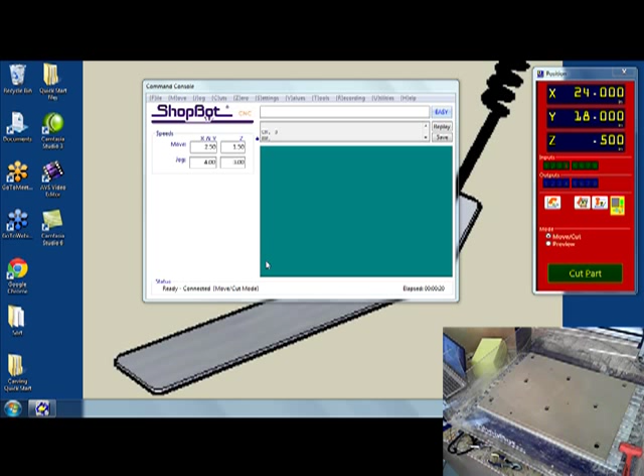Today's training is going to be doing some examples of some alternative hold-down methods. We're all used to using our screws or our vacuum, but sometimes we've got to come up with some new ideas. So I'm going to show you some stuff with some clamping and some fixturing. I'm going to show you some aftermarket accessories you can buy, and then we're going to even get into using some 3M adhesive to hold it down to the spoil board just with some spray adhesive without making too big of a mess. So let's go ahead and get started.

So one thing that we have now created is a thing called the quick start files, and this is something that we made available for our desktop, but any of these can be scaled up and used with the bigger machines. If you look at the camera right now and see our spoil board, we've got our 18-inch by 24-inch spoil board mounted on our desktop, but we've got a rabbet cut all the way around it. We used the VCarve Pro software to have it cut on the negative of 0 Y and 0 X.

So it did just that. So when I put a board or a piece of material up here, I can line it up right with the corner of that rabbet, and that way I ensure I'm getting my 0, 0 every time. So we've created this quick start jig where if you go in here and look at the basic deck, you'll see this basic deck that you're seeing on the camera.

You're seeing the oblong holes that are used so you can mount the T-nuts into the aluminum extrusion. And you can see right here where there's a rabbet tool path, so it will cut down onto the negative part of X and Y. So this is just a real nice little feature that we've got that can go onto the table.

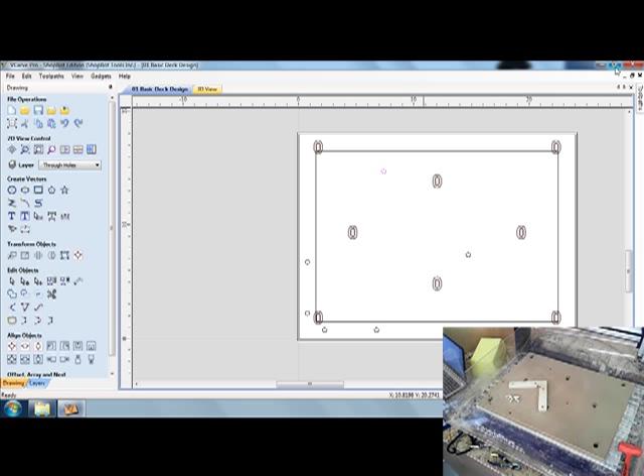So these are holes that we drilled down into the spoil board where we're going to put a dowel pin. You can go to any of your local hardware stores, or you can order them online. They make these little dowel pins, and with the dowel pin we have a corner jig and two tapered blocks that we'll use to hold our material down.

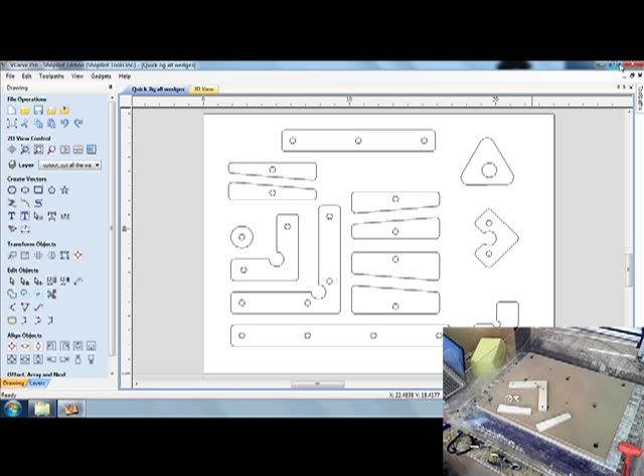And again, with these files, not only do you get the basic deck, but there's also the quick wedges. Here's all of your different types of wedges you might be using. Maybe you're doing something that's round or a polygon that has more sides that isn't an even square, so you can clamp it in place. And it also has a set of projects, and we'll get into them in a sec, but let's focus back over here on the camera.

If you notice, here's our 4 holes. I can just push my dowel pins down inside these, and these holes here, I can take my jig and set it right on top.

And since these are freshly cut, they are stiff, well, they fit in there. Then I've got 2 out here in the field, and you can put these any which way you want. There's some people that go and put a whole series of holes for doing different sized parts. What this jig here is for is our little quick start file that has the different projects in it. So I'll tap these in,

and the way this jig is set up is it's able to fit a certain 11 5/8 by 11 5/8 blank that we have. We set it right in here. The corner's cut out round, so the 0, 0 corner can get down past that. And then these tapered jigs, they slide in place, and then you just use your mallet to tighten them up so that it won't come loose, and now that's held in place.

So this is just a nice little feature to make it easy to pull on and off. I get done with my cut, boom, I loosen up my jigs, I pull it out, I throw my next blank in, tighten these down, and hit file, part load, and go again. So nice little feature we've got with these jigs. And here's one of the project files that we cut.

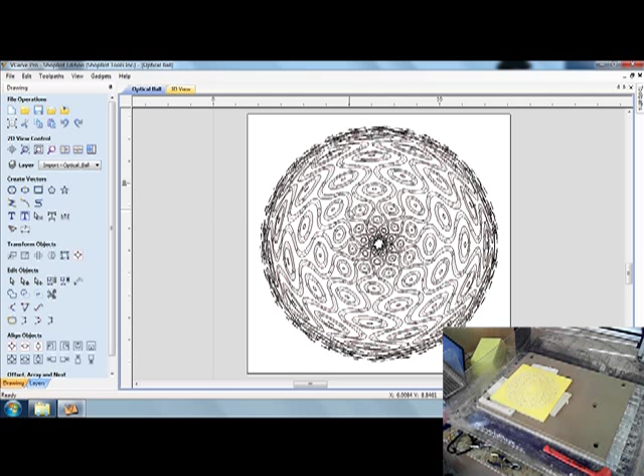This is called the optical ball. And I'll bring up the VCarve Pro file for this. And right there's nothing that we're not used to seeing. The white background showing our blank size and our part in it. But one thing, if you dial in right here and look real close, there's some phantom lines. And where these two come together, that's your actual 0-0 origin. And notice that the corner of this material is over and up. And if I pulled in some measurement lines, I see it's 1.5 inches, 1.5 inches over.

And if you go up and check your setup job dimensions, notice when this file was created, instead of having it at 0-0, there was actually an offset put in of 1.5 inches and 1.5 inches. So this will make life a lot easier for you, if this is a jig you're going to use, to put that offset in. That way you're not having to move the keypad around and try to 0-0 it by hand or by eye. So you can always put an offset in right into your file, and it'll toolpath and everything will come out just like you normally do at 0-0.

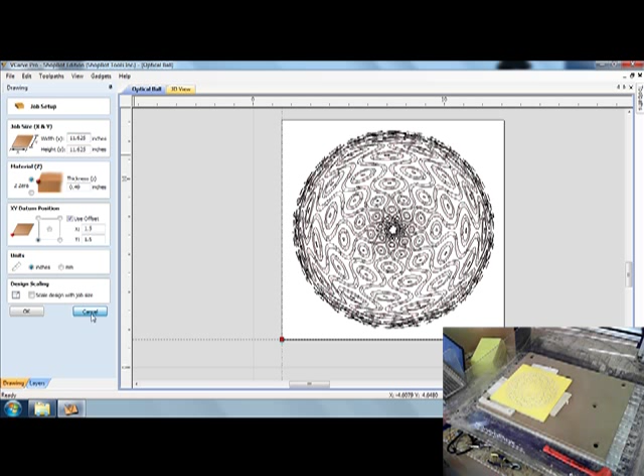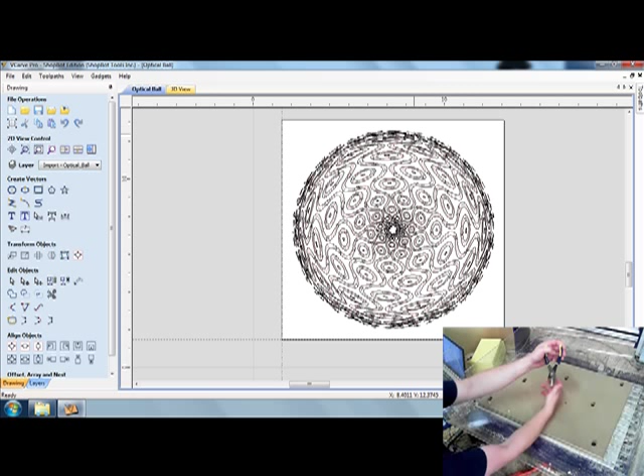Yeah, that's an option. The nice thing about this is, if I'm done cutting with this, all I have to do is loosen these out. I pull my jig off. I can pull all these parts off, and I pull my dowels out. And there's nothing left. There's nothing in the way. There's no hardware. There's nothing metal it's gonna run into. There's no clamps. It's all just removed. I'm back to a bare spoil board.

The only thing, just keep in mind when you start cutting a lot with these, you will fill up these holes with sawdust. So sometimes you have to blow them out or vacuum them out before you go on to your next cut. So that's something we have called a quick start guide. And like I said, just call in if it's something you want to use.

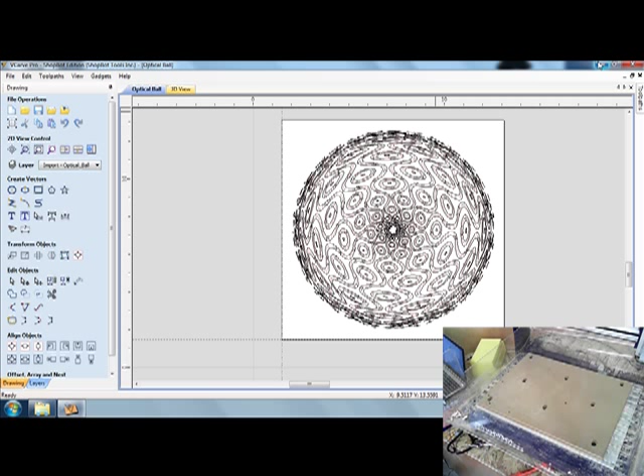So just to start going along with these tapered little clamps to hold things in, I had to go out to Greensboro, just west of us in North Carolina, a couple of months ago, and I got to work with the local state's Skills USA. And Skills USA is vocational programs at your secondary and post-secondary level, and what they do is they have competitions in cabinet making, construction, baking, cosmetology, all kinds of stuff, anything in the vocational trade. So I got to go out and help with the cabinet making.

We took a ShopBot out there, and we got to do some pretty neat things. So the kids had to build this. It had a drawer and a door. It was a little footstool they had to build, all out of maple and walnut and some various plywoods. So one thing that they had to do with me is they had to bring over their part, and it had to be an exact size.

And what they would do is they'd have to sit it inside of my jig, and then I would put my clamps on, hold it in place, and then run the file. So for them, they had to bring it over. It had to be a certain size or it wouldn't fit.

And being a former high school shop teacher myself, I remember that when you tell a kid that this needs to be 21.5 by 9.5, they're not going to bring you something every time that's 21.5 by 9.5. Just learning to use a tape measure seems to be an issue for the next generation here.

So what I did with this is I actually oversized it a little bit. So on this top here, it's a little bit bigger and a little bit bigger. So then these wedge clamps can come down in and actually wedge a board in there that might not be the correct size. So they could actually be plus or minus, say, 1/8 of an inch bigger or smaller, and it would still fit in my jig. Because I'd hate for them to have to come over there and it didn't fit, and then they couldn't continue on.

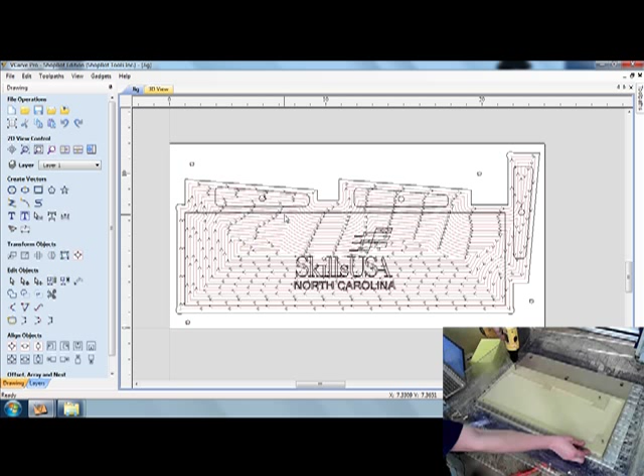So I set it up on here. I find where it's 0, 0. I line it up with my rabbet. It screws down in place. Alright. So with this being screwed down in place, now when I do my C3, it's going to come over and find 0, 0 like it did, but I don't have an offset on this one because I'm actually going to draw my toolpath off this part.

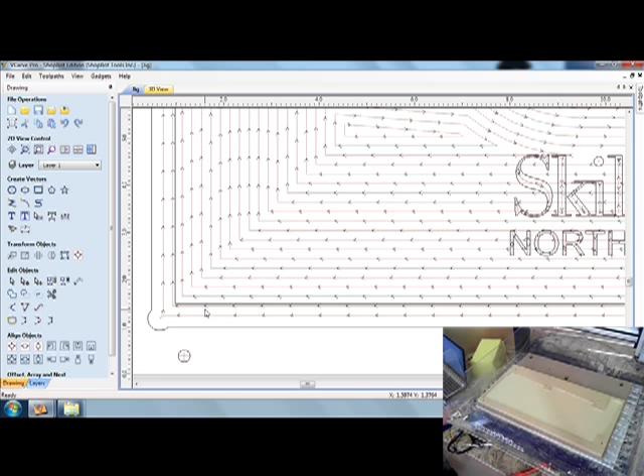So the way this one would be is I would put that on, they would bring over their project, that would sit, and I'd take my 3 clamps, 2 of them to hold it down this way, and 1 of them to hold it over this way. So this 0, 0 never changes. If they're a little bit extra this way or a little bit extra that way, they're still going to be off the same 0, 0. So the V-carve would be in the same spot on that. So that would be held in place right there.

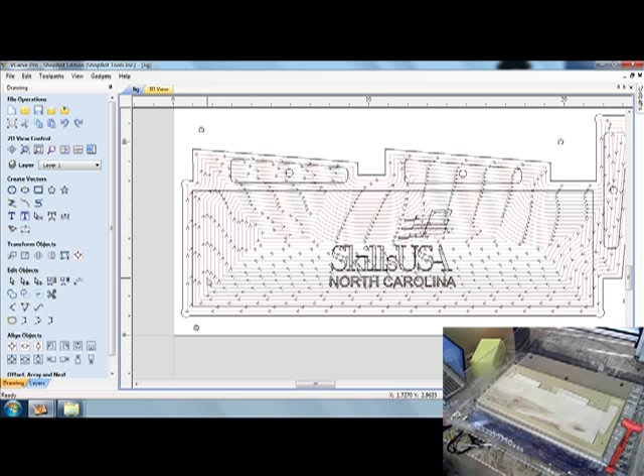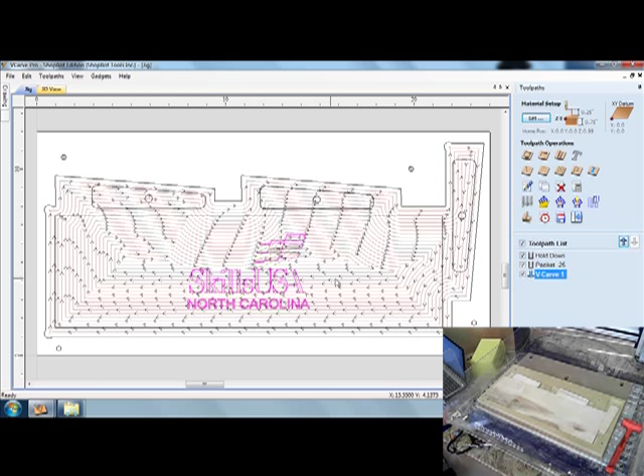And at that point, you'll see that the toolpath for that was just the V-carve that I had here, 0 to the top. So it doesn't matter what part they would bring over. If each piece was plus or minus a little bit of X or Y, it was all the same thickness and material that we had. I didn't have to re-zero it every single time.

So to go ahead and cut this on here, let me save this V-carve out, so you can see how this thing holds in place. Let's go. V-carve skills logo. And with that, I'll open up my ShopBot software. I've already zeroed my X and my Y, but I have not zeroed my Z. So let me just quickly jog it over. We'll jog it over 4, 4.

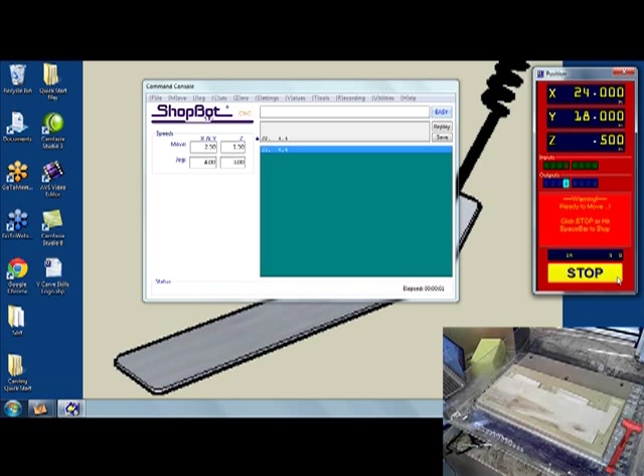I don't know who found this piece of wood with a knot in there, but that's all they gave me.

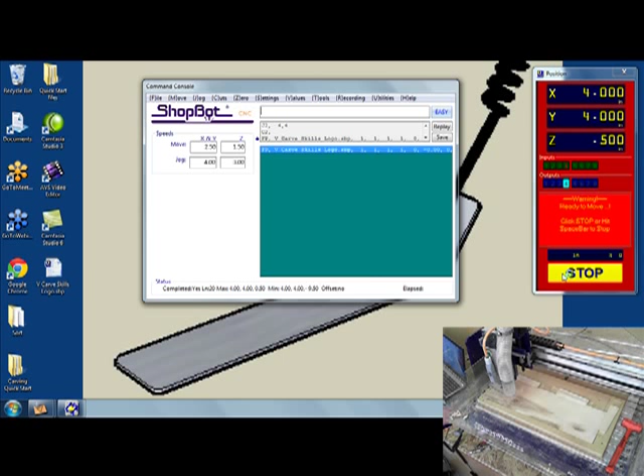And then I can just load my file up. Everything's going to be held in place with my little jig, and it's all good. Okay.

So just to think about what we've seen so far, we had one fixture that used the wedges that was built down into the table. This is a fixture that can come off and go onto anybody's table. As long as you set it up with the 0, 0 at the same spot, it's always going to be lining back up.

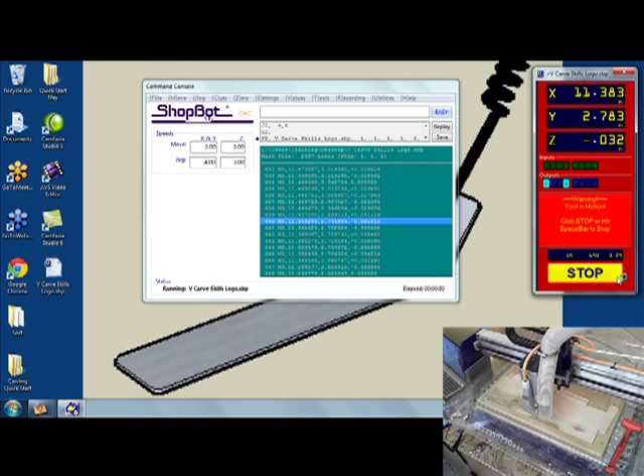Of course, I gotta put in the disclaimer, all of you at home, you're gonna have your guards in place and your dust collector on and all of that. We're doing this for demonstration purposes only.

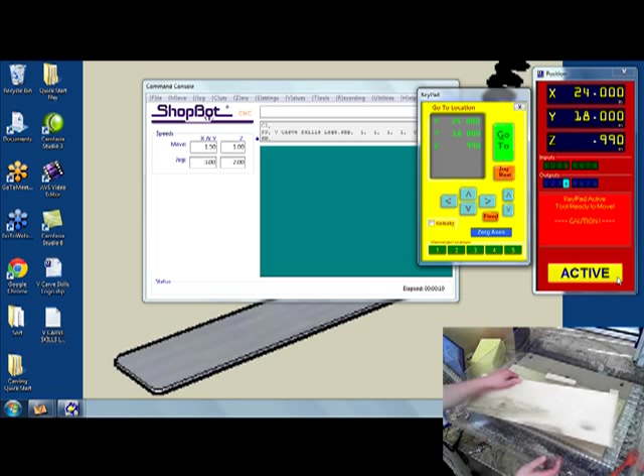Alright, so there's our little thing. So for this it was nice because I had to do 15 of them, and we had to do them quick as the kids brought them over. As soon as they get done, I loosen it up, pull their part out, hand it to them. Next guy comes and brings his and sets it in place. So nice, quick jig. Made it nice and easy to transition from piece to piece.

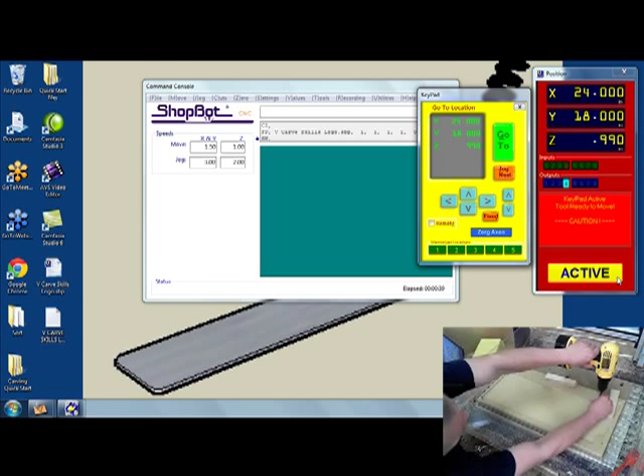And so just remember too, when you start getting into making these jigs or fixtures, if you have a part that you're cutting at a certain size, maybe you wanted this to fit these little plaques, you need to make sure that when you go and cut your jig out for it, you give it a little bit of a tolerance, because the ShopBot will cut it exact to that dimension. So if you have a 6-inch circle and you put a 6-inch pocket for it to come out of, it's probably not going to fit in there. It'll go in, but it might not come back out.

This next jig I'm going to show you is one that I use for cutting out little medallions at our training. So I've got these medallions here that I've got several of them already cut to size, and all I want to do is show how to do 3D carving. So what we would do is, it shows right on the jig, mount it at 0, 0 is where we would mount it and screw it down in, and then the plaque would fit right down inside of it. And this is just a friction fit. It actually fits really tight right now because the humidity is up here in North Carolina.

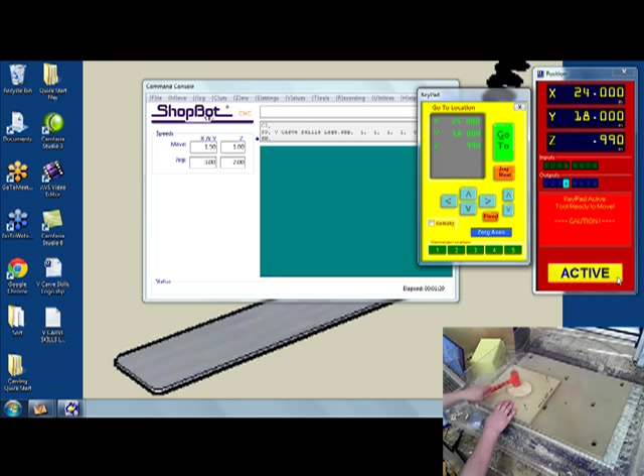So then I would bring it over and zero off the top. I could just pull this plaque out. Maybe I had to flip it over, do a 2-sided carving on it. I'll show you the file on that one. So really all that one is the Plaque Jig. So there's the jig with the different plaques. There's my jig, and you can see there would be the plaque. Here's the original plaque over here that I had, and then here's a little bit of a distance in between.

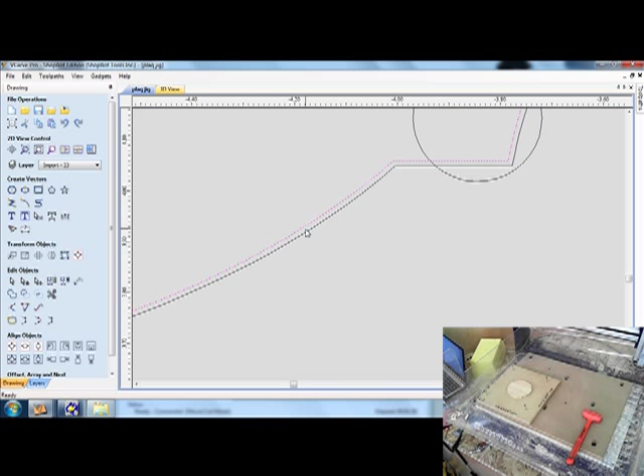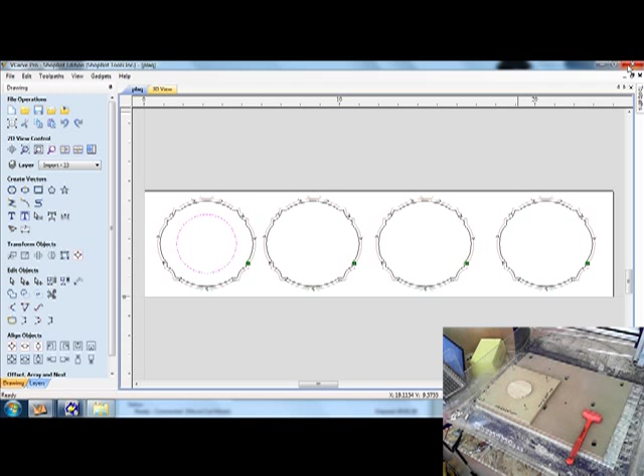It's a 0.01 in between there, so I put a tolerance on it so it actually pocketed it out a little bit larger. So I've got that fixture, and then I can sit here with my other wood and just cut plaques out and have all these plaques ahead of time, and then I know when I go and create my 3D carving, that 3-inch circle that I cut right there fits in there very nicely. So just another quick jig to show you. But this one's been real nice for training. I throw it up every month, screw it down at 0, 0, do my C3, bring my ball nose over here, C2 it, have the new students design their 3D, and then we cut it right into that plaque.

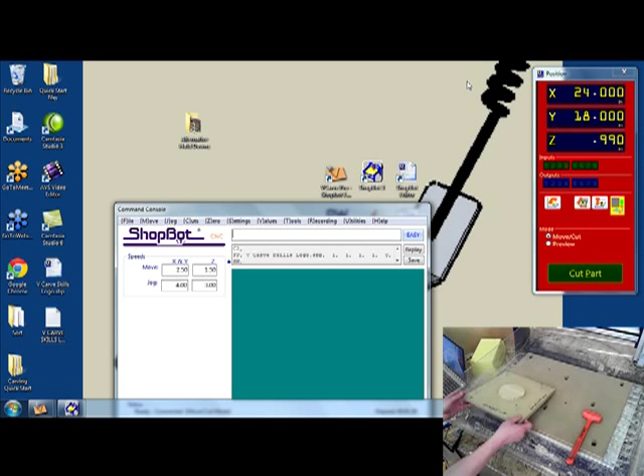So another one that's kind of neat to show is, these are all ones that are nice because they're easily removable. The one I was looking to show you here, this is the one that we did in Atlanta last year at our IWF show. So we cut these plaques out. So if you look at the camera right now, I had all of these wood chunks made for us ahead of time. All of these were 3/4 inch and all the same width and same length.

So all we did was we had this one desktop set up, and all it did was cut the 3D clip arts out for all the different armed services. And then when people would come by, we'd hand it to them, thank them for their service, and throw the next one in. So if you look at the picture, you can see where we got a little bolt right there, one underneath the sawdust, and then there's the same thing over here in the X.

So what I could do, as soon as that thing got cutting, move it out of the way, hit the 4 clamps off, and throw the next piece in, bring it over to those bolts, so it was 0, 0, and hit enter and start cutting again. So pretty slick little jig.

The only downfall about something like this is now I've kind of got these 4 clamps and I've got them bolted into the table, so I've really now dedicated my table to this. If it's something where I had to run 1,000 of these or it's a dedicated machine, it's not a big deal. But if it's a community used machine where it's this one day and that the next day, you got a lot of time into setup.

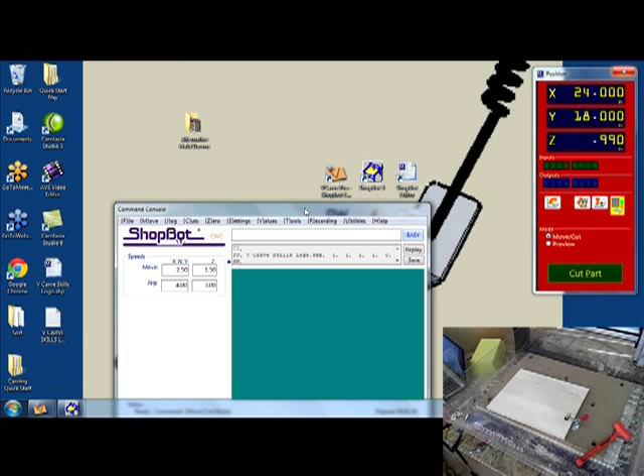Another thing, look at those red handles. I think they made them red for a reason, as he pointed out to us. You run into those with your bit, and they're steel screwed down into your table. You're probably going to break your bit. So when you get into drawing your files, you'll actually want to create a different home position.

So another thing that we have, and I've been getting real fond of this one lately, it's your regular old nail gun that we're all used to using, our finish nail gun. This is a gun that's made by a company called Omer, O-M-E-R. But instead of shooting the steel nails that we're used to, it actually shoots a plastic nail. So it won't matter if we run into it with our bit. The bit would cut right through this, just like it cuts through the different materials. If it was the metal nail, it would ruin a bit.

But it's a real nice little gun. It doesn't hold up the best for oak or maple, or real hard wood, but to put it down through plywood or into MDF, it's a good holder. It does hold really well. The thing about it too is when you go to snap them off, it usually breaks the nail off inside and leaves it nice and flat, so you don't have to come back and sand these. So that's another thing that's real nice about that gun. So just wanted to show you.

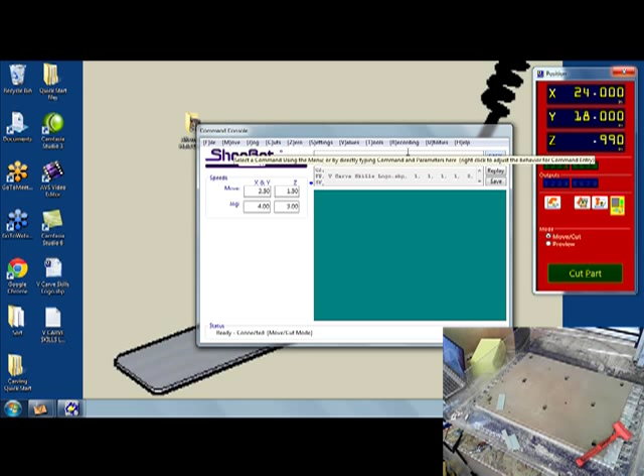Alright, I think I've got two of them left here. My favorite two we'll spend a little bit of time on. But before I do that, I did have a couple people respond when I sent out the email about alternative methods. I said, hey, what do you have that you want to share? What works for you?

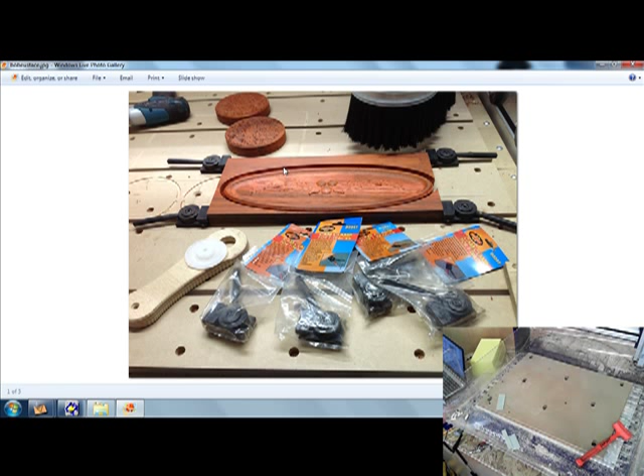So Bob Eustace sent us this from way down under, who has a shop, and he uses these cam clamps. They go down in little T-slots, and I believe he said he got these from Rockler. The way they work is you get them up close, and then you pull this lever, and it sucks it in tight. And he's got his whole table set up with these, so he's really got a great table set up for fixturing, built right into his table.

Alright, so the two that I have to show you, one of them is one that we can purchase, and one of them is a homemade one. The one that's available, there's lots of different companies out there that make these little vacuum clamps, and this one here is called a V-clamp, and it's by vac-clamp.com, and I'm a big fan of this one. I like using this one a lot.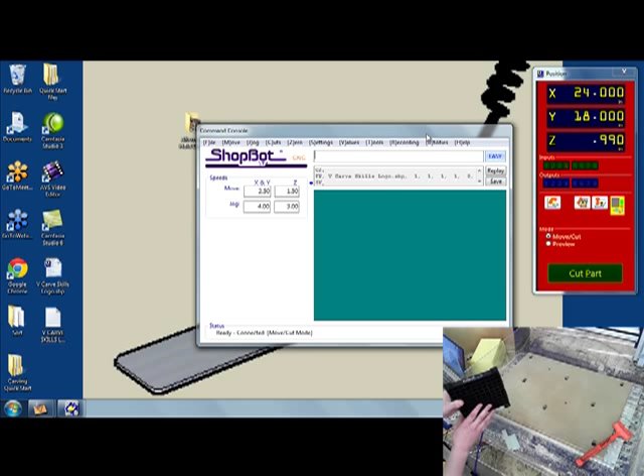So what you can do is set it right up on your table. I'm going to zero it right along my edge right here. I'm just eyeballing it right now. Hold that in place.

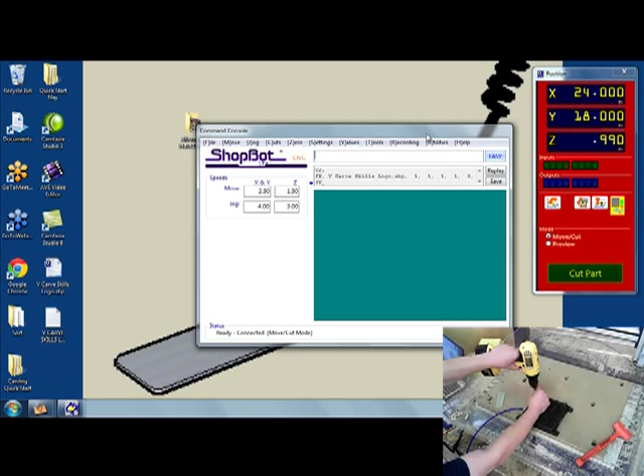So these are great. The only thing is you want to make sure you're not cutting down inside of them, because you don't want to wreck that gasketing. So what it is, it hooks up to your air compressor. You're going to need a big air compressor that's got a lot of volume in it. It goes in, and it goes into its little valve. It puts out air here, and then this is a gasket that goes all the way around it. So that gasket can be pulled out and moved to these different tracks for different size material.

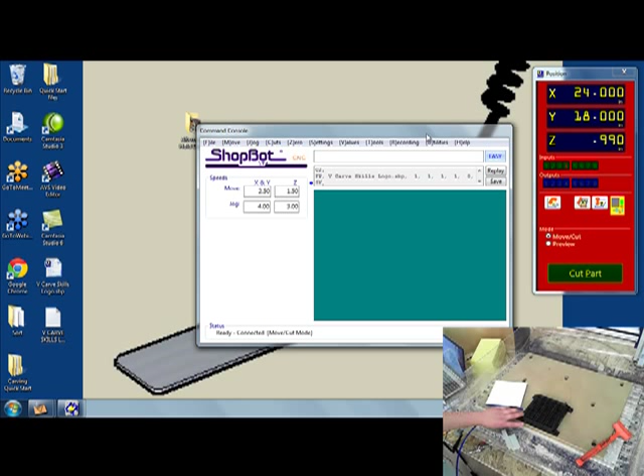So let me plug it into the air, and we'll try to hold down our piece with it. So it just blows out air right here. So what I'm going to do is just kind of eyeball getting it close to flush on this edge. And if this is something that we were setting up to run and mass produce, I'd have fixtures and stuff to make it just right. But just by setting it in place, get all the dust off, setting it in place, apply pressure down on it.

Now it holds it in place. So now it's stuck on there. And it holds really well. It's a neat little clamp. So this is great and all. We're now ready. It's clamped. It's ready to be held. We're not at 0,0. Let's set up the machine and cut something on it real quick.

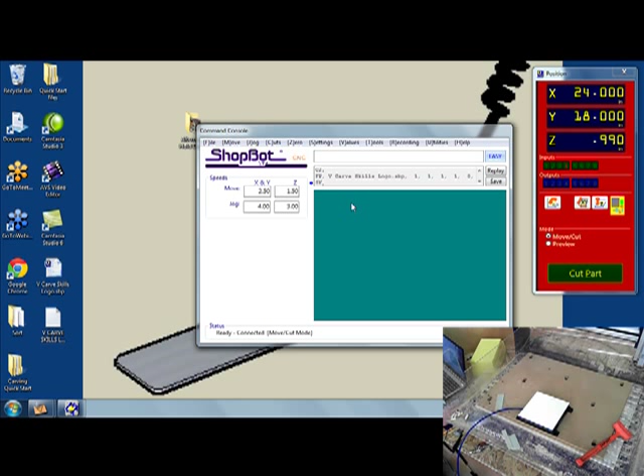So first of all, let me make sure that I move my Z up to a safe height, which it is, and I will jog home. And while it's jogging, I'm going to measure how far over it is to the edge of that material. So it's 9 3/8 over. So there's a couple different ways here. We could put an offset in, which we already showed you, so let's do something else here.

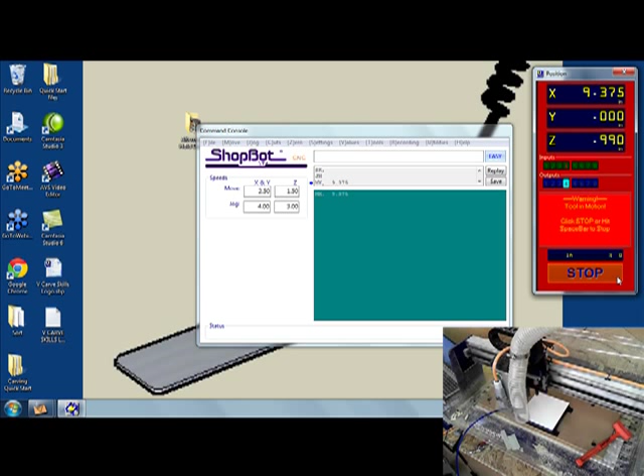Let me actually move X 9.375, which is going to move that X over. And there it is right over the corner. And now I can come up here in the ShopBot software and go zero X axis. And as I do that, watch how this X here changes to 0. Zero X. Oops, sorry, it's thinking. Got a lot going on here. Zero X, so 0,0. So that's now my 0,0 point. So I can still draw in my VCarve Pro at 0,0, and it'll come out over here.

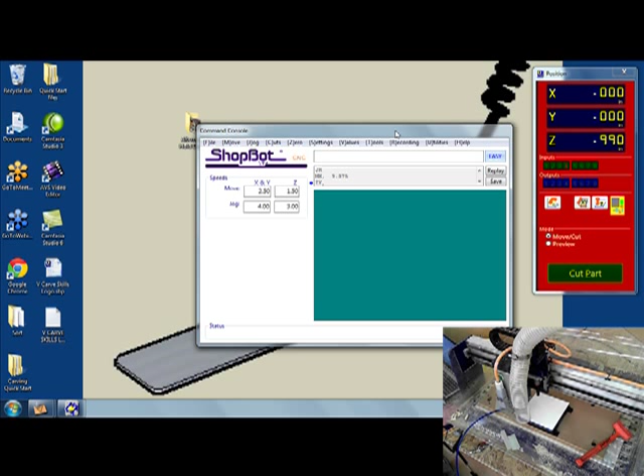So let's first put in a tool bit that we'll want to use. And let me do a page up. We'll put an 1/8" straight bit in. Let's see if somebody's got my wrenches.

If you have a spindle, like the one shown here, or if you have one on any machine, you're going to want to make sure that, one, you do your warm-up routine, which is C5, your quick command. Do that warm-up routine. And every time you pull a bit out, check the collet for wear and tear, pull it apart, knock the sawdust, blow it out, and make sure you spring it back together. If it falls out, the spring is sprung, you need a new collet. But make sure this is together before you put it back in. This is the correct way to do it, and it's going to save you down the road. I sure don't want to be buying a new spindle just because of some silly mistake.

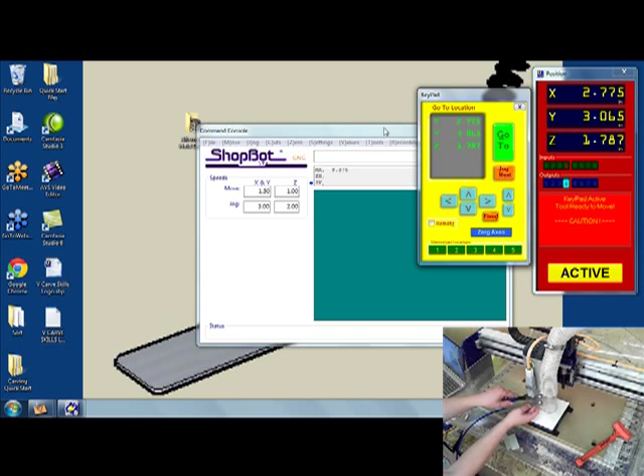So I'm going to put my 1/8" straight in. And with these, I go snug, and then I go just a little bit more. I don't need to go prove how strong I am to the thing. Alright, we're good. This will be the part where I get talking and not paying attention, forget to do my C2, and then all you guys on my chat window start giving me heck when I break a bit. So I will make sure I do it now. You'll get me later on in the training, don't worry.

Alright, remember to move that alligator clip. You wouldn't believe how many calls we get a week: oh yeah, can I buy just one of those black cords that you sell?

Alright, so we're good. Let's go in and create a file real quick. Let me close out some of these. So, let's open up a new VCarve Pro. And I'm going to measure my piece over here. It is 6 3/8 by 6 3/8.

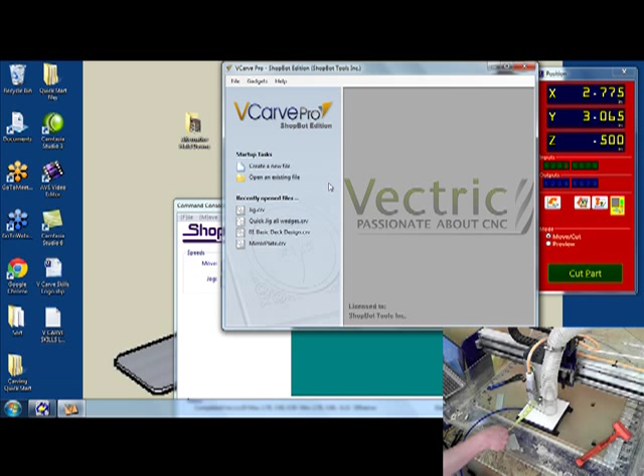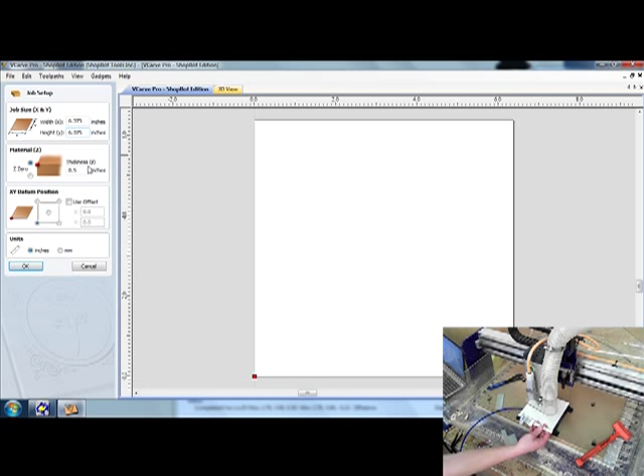Create a new file. I said it was 6.375 and 6.375. It's 1/2" material. We don't need to know exactly how thick because we're not going to cut through. If we did, I'd say get your calipers out like this and do a caliper. See if it's actually 0.5 or if it's 0.51 or is it 0.49.

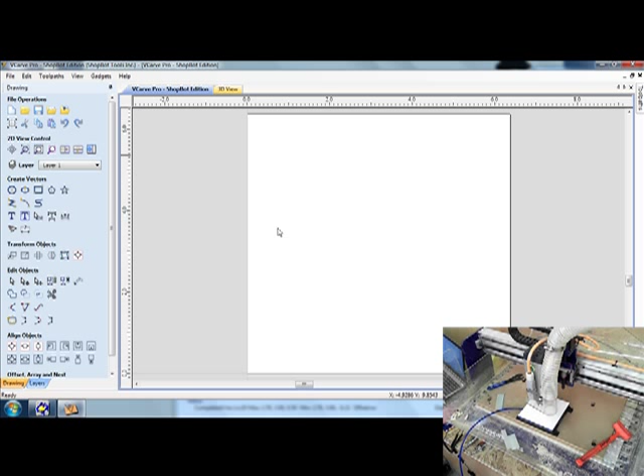What is it exactly? So let's just bring in a DXF here and cut something out simple just so you can see it hold. Oh, who doesn't want to cut the ShopBot logo, right? So we could take this, I'm going to hold shift, do a rotate, that way it rotates in increments. And center it in the material. Again, if I hold shift and shrink, it shrinks it in right there. So I know my bit's not going to get down in there, and we know nobody in this class would want to steal that.

So let me just do a pocket. Well, how deep do we want to go? I'm using this plastic here that's 2 colors. So I would like to get down into the blue to expose the blue. So I will use my calipers and say, alright, if I cut down 0.07, I should see the blue. So 0.07. Get that 1/8 inch bit that I just put in.

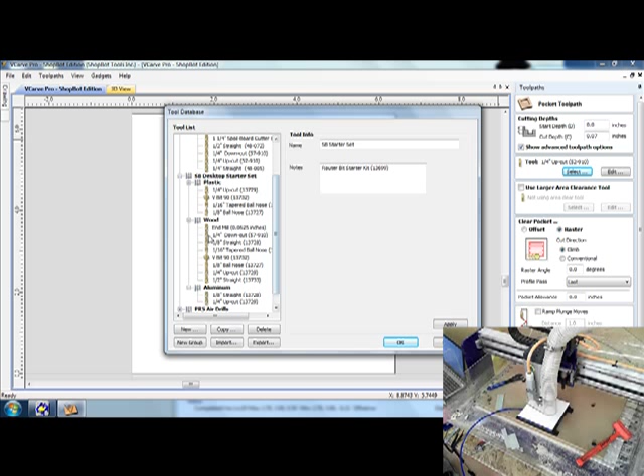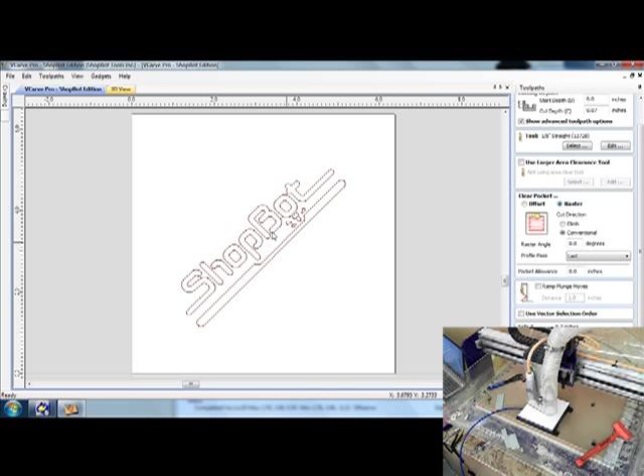And I'm not gonna worry too much about this stuff right now. We'll just pocket logo, and I just want to do a preview. No vector selected. Alright, now the chat window is going to start blowing up. You're starting to get ahead of yourself. So let's select all the vectors. Calculate. So let's see if it actually looks good. Maybe it's not a big enough logo for the 1/8 inch bit. I preview the toolpath.

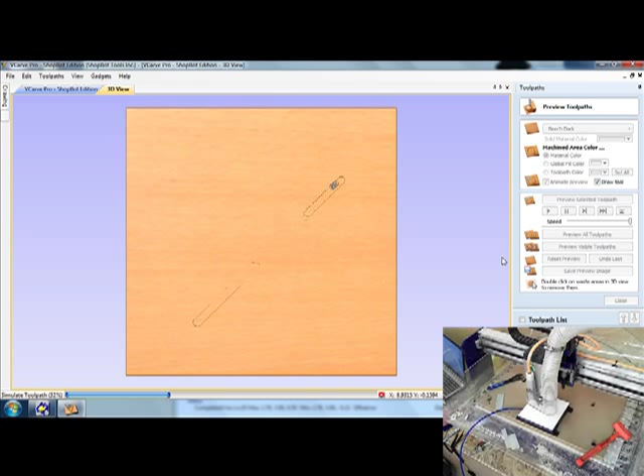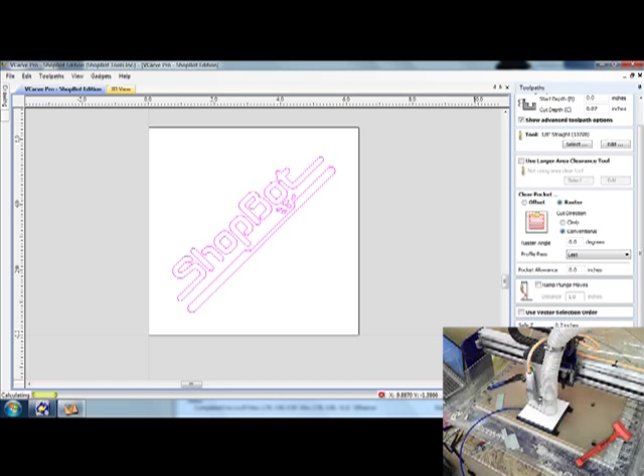I'm already seeing some stuff that I don't like. Let's give it a fill color. It's not doing the full logo. It's not doing the full B. So I need to stretch it, or I'd have to change bits, whatever the case might be. So go ahead, we'll stretch that out, to recalculate it. Calculate. Reset. Preview all toolpaths.

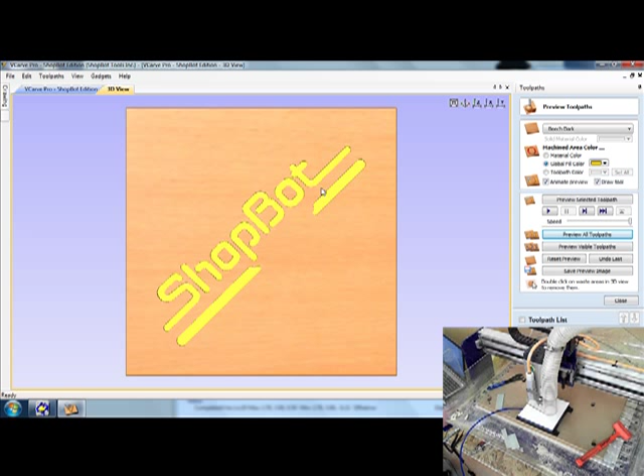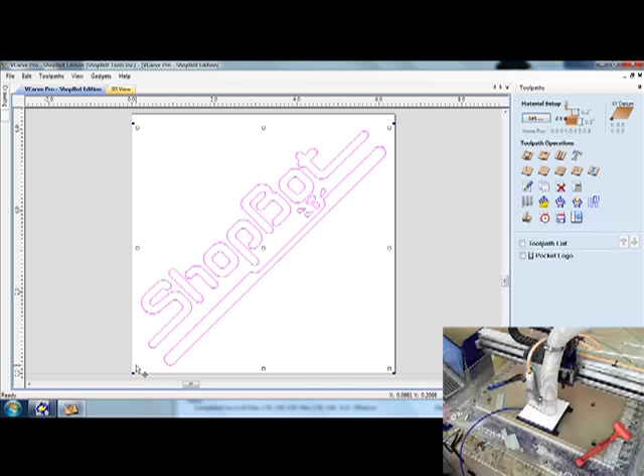So that's right, it's how it's supposed to be. We're still not getting through the bottom. So, and we're missing this. So this is one that you probably actually want to use a smaller bit for. We end up making this too big for our block. Not giving up though. Can offset that. There we go.

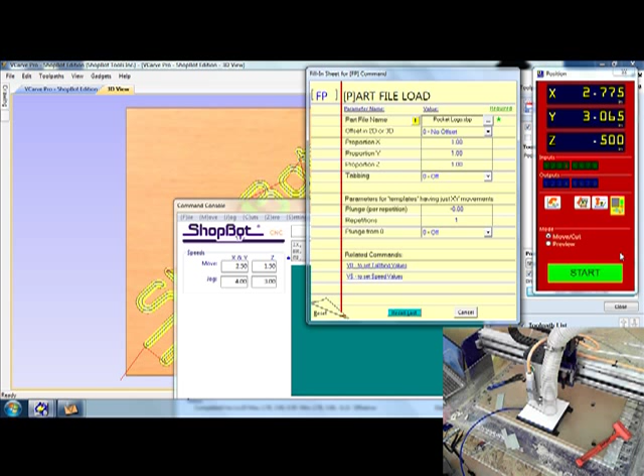So we'll go ahead, we'll cut the pocket logo, save, pocket logo. Another thing you might not always know is you can go right here and go output direct to machine. So if your X and your Y and your Z is already done, you might as well just have that clicked if this is the computer you're using. Run pocket logo, start. Is the right bit in? Yes. Is it zeroed? Yes, we zeroed it to the top. And go ahead and turn your spindle on and start your cut.

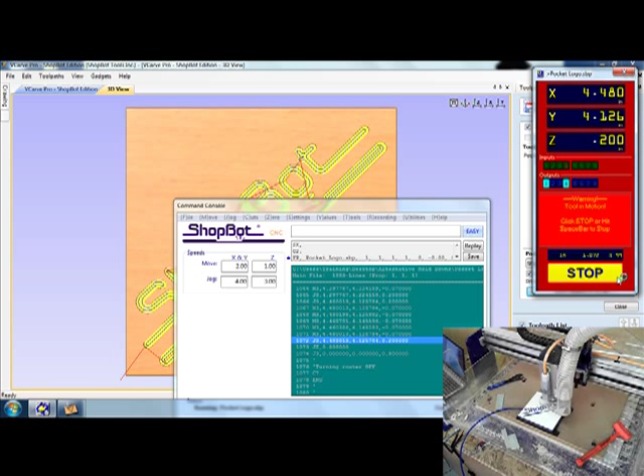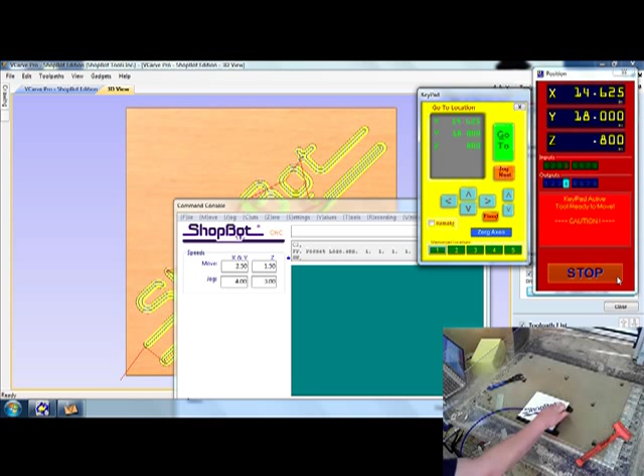Alright, so there's our file run. I'm going to move it out of the way so we can see it. And there's our piece. It held right on there, nice. Looks like we need a little bit smaller bit. Could have got in a little bit better detail, but I can just kill it right here and pop it off, and it looks good. ShopBot logo put right on a 2-color plastic. So that's that one. I'm going to unscrew this, and I got one more to show you.

This is with some spray adhesive. This one works great. It's a really nice thing. However, it gets a little messy. So whatever you got laying around that you don't want any spray on, you better move it out of the way. So sometimes screws aren't an option. Sometimes I just don't want to deal with tabs. You got some piece, maybe in an acrylic or plastic, where it has to have a perfect edge, and with a tab, trying to sand it afterwards just isn't going to work for you. So this is a 3M spray adhesive technique.

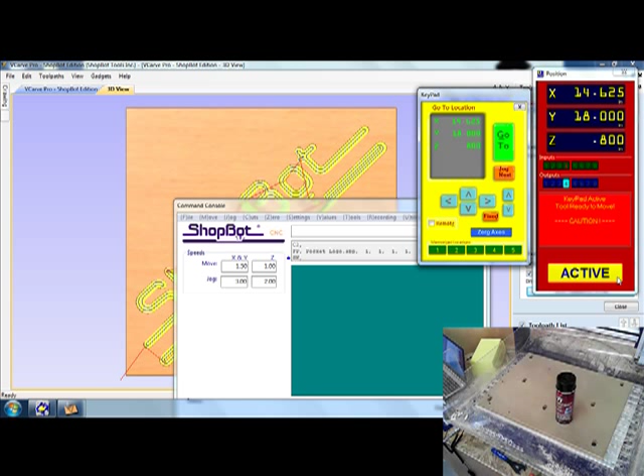Alright, so here is our 3M spray adhesive. It works great with plastics. Haven't done a whole lot of hardwoods with it, but these plastics. So think about this. What we're going to do is we're going to spray the back of this, we're going to spray the board, and it's going to hold it on there. And it'll hold it on there good enough that we can go ahead and do profile cutting all the way around it, and then peel it back off when we're done.

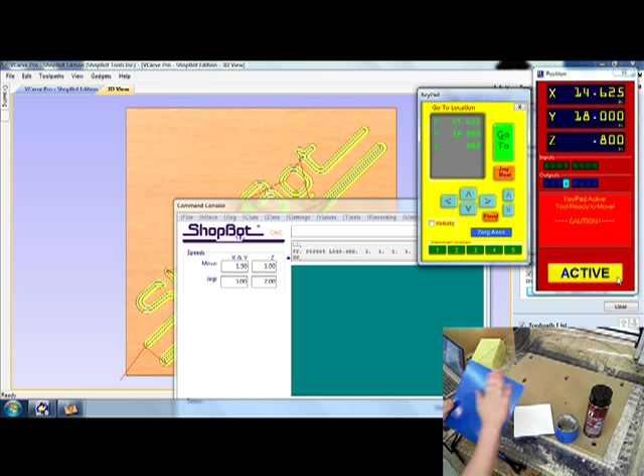However, whatever the spray has touched is going to leave a residue, and it's going to get nasty. This is a clear piece of plexiglass. It just has some blue cover on the back side. Notice here, whenever you have loose stuff, you want to make sure you pull that off if it's going to be on the top, because it'll get sucked up into your bit. For us, this is right on the back. So I can just spray this right here, and have it glue down to it, because that's going to get peeled off anyways.

If I had like the ShopBot one that we were doing, where that was the good face, I could just take the painter's tape, and cover this back, and then just spray this. This right here will keep you from getting any of that nasty all over your part. So you just spray that. So that's exactly what I'm going to do with this guy right here. I'm going to put it on the back because I don't want to spray my good side.

So saturate it pretty good. And this stuff, if you just read the instructions on it, it'll tell you how long it needs to sit and whatnot. But you do have to do both faces. Oh. One thing I don't like about screws and MDF is you probably can't see it well in the camera, but it leaves these little dimples on there, and then you kind of lose your flat area. But you can push them back down pretty easy.

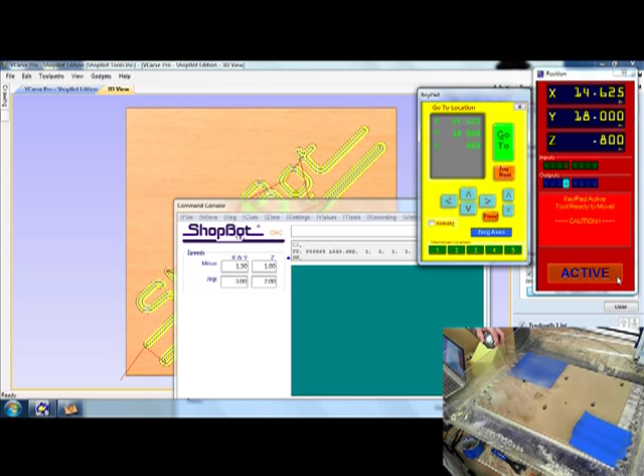All right. Make sure you flip that sucker upside down and clean out the nozzle too, or you'll have a can of spray adhesive that you can't get into. All right. So give this a sec to get tacky. You can read on there too how that needs to work. But while that's doing that, let's create a file here. No, we don't need to save that. So let's create a new file.

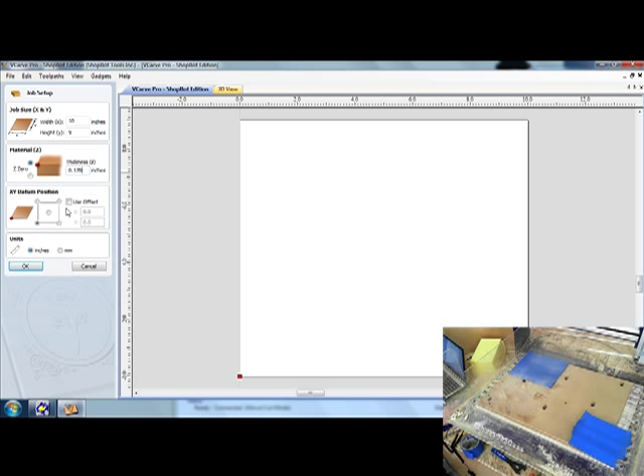Our piece is 10 by 9. So we got 10 inches in the X, and we have 9 inches in the Y. I actually used my calipers earlier and figured out how thick this is, and it measures 0.178 thickness. And I am going to zero to the top, and I hit OK. Now let's just cut something out real simple.

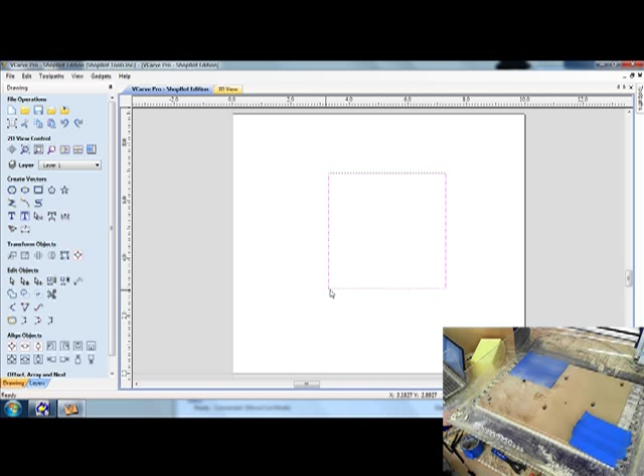This is kind of a neat trick here. Let's just create a square. Say we'll go 4 inches by 4 inches, and let's take this guy. We'll rotate. I learned this one from Ryan, who was my trainer when I started training here, so I don't know where he got it from. You can just rotate that, create an arc, and boom, you got a nice little heart. I'm sure that was one of James's or something, but it's just a quick heart.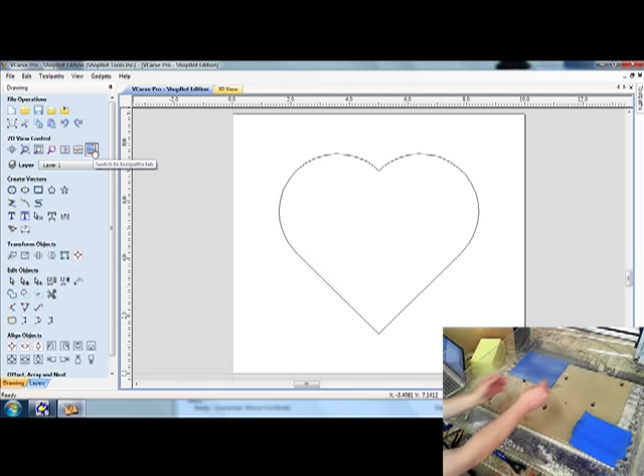This is getting pretty tacky. So I'm going to go ahead and just line this guy up with 0, 0. That holds right in place there. Alright, so with plexiglass, there's so many different types of plexiglass and acrylic, so check what material you have when you go to set your toolpath. This one I actually know is something that they use for golf cart windshields, so it needs to be cut at a high RPM.

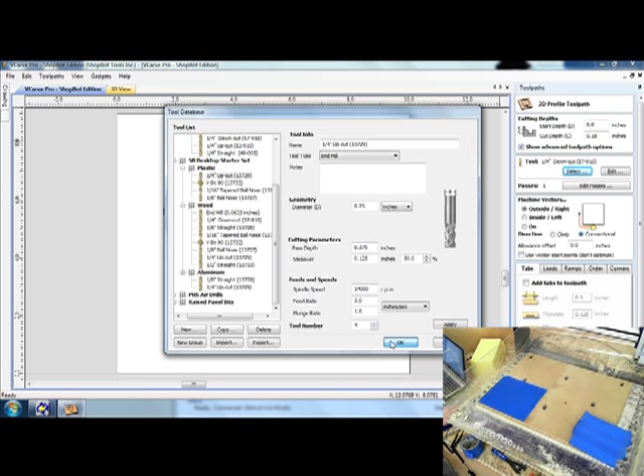So if I said it was 0.178 thick, I'm going to go 0.18 deep. I'm going to go in and select a bit. I'm going to use a 1/4 inch O-flute up spiral right here, 1/4 inch up cut. And I'm going to go ahead and hit OK, but I am going to come back over here and do some modifying. Pass depth, I'm only going to go 0.125. I do want that to be a higher RPM. And the 3 inches a second is fine for this, so I'm not concerned about that one.

Alright, just double checking here. I know when I get talking I don't pay attention. So let's just select it. We'll go on the outside, go conventional. I don't need to add tabs because it's all glued on underneath here. And let's just go profile heart.

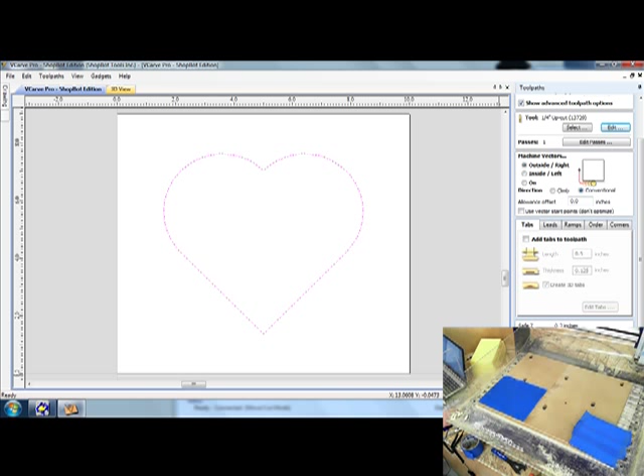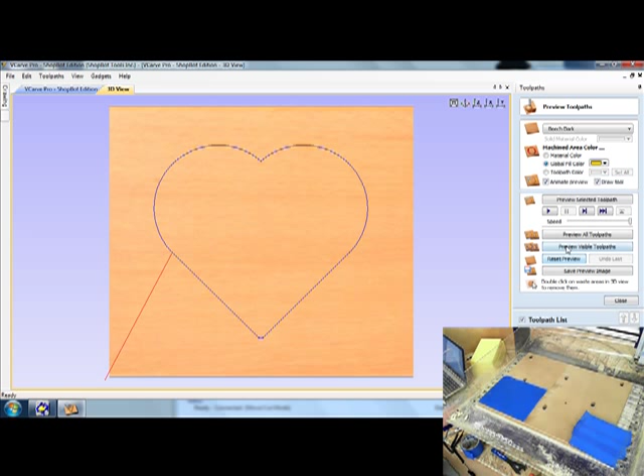Calculate. Warning. As many times as we've seen the screen, it's easy to click through. Check it. That one time that you don't, instead of it saying 0.178, 0.18, it's going to say 1.8. Trust me, my spoil board at home has a reminder for me to check that every time. So good, I'm happy with that. Preview it just to make sure it's the way you want it. Looks good.

I am going to just slow it down just a little. If I remember this plastic, it needs to be about 2. So know your materials. If you change anything, hit calculate. Alright, so let's go and save this. I do not want to go direct to my machine. I need to re-zero it and change a bit. So, profile heart.

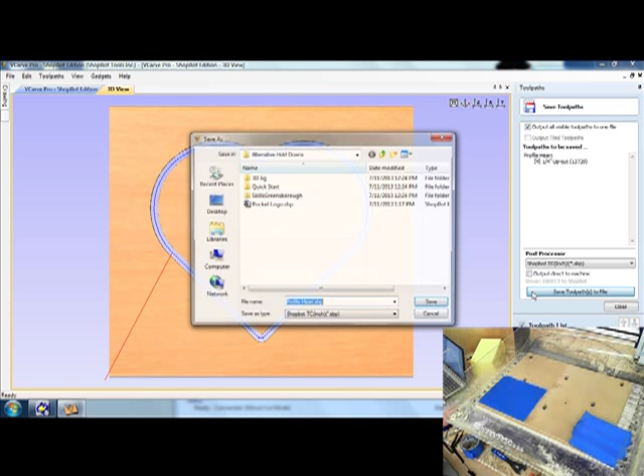Alright. So, right now if I said jog home, that's not going to go all the way over to the corner. And why is that? Well, that's because earlier today we moved the 0 over to there. So just to fix that, so I can get it back, I'll just do a C3. Just 0 my X and my Y with the proximity switches. And then the last thing is I need to put the bit in and 0 my Z.

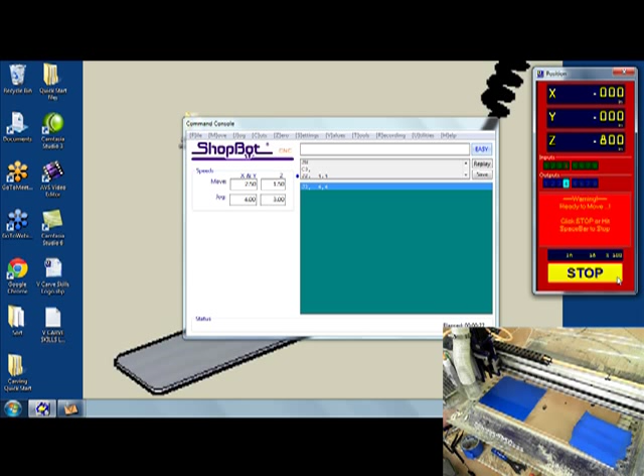Okay, so let's just do a jog 2, 4, 4. Move this over. Again, I'm changing a bit. I'm going to pull it apart, make sure it's good, spring it back together before I start cutting. If your threads aren't going on quite right, don't push it. Take it back off. Check. One thing you don't want to do is mar up those threads on that spindle. That's not an easy fix by any means.

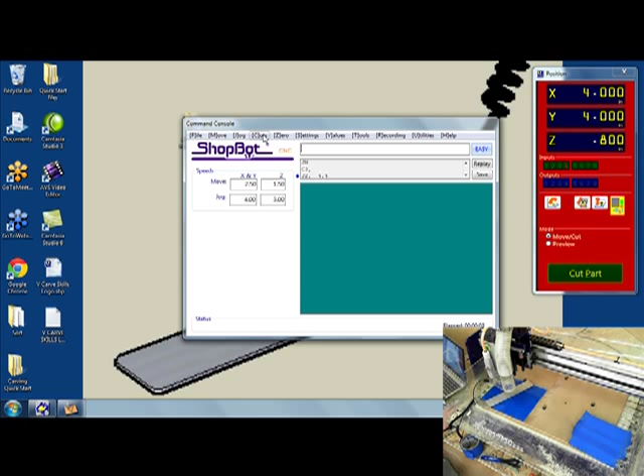Now you got all these plastic chips laying around from my previous cut. Make sure they're not in the way when you 0. And if you ever feel like you got a false 0 reading, just do a C2 again. Just rerun this 0 routine. Some people like the icons. I've been trained to do my C2s. C2, quick command. I can just type in with the keyboard and get that.

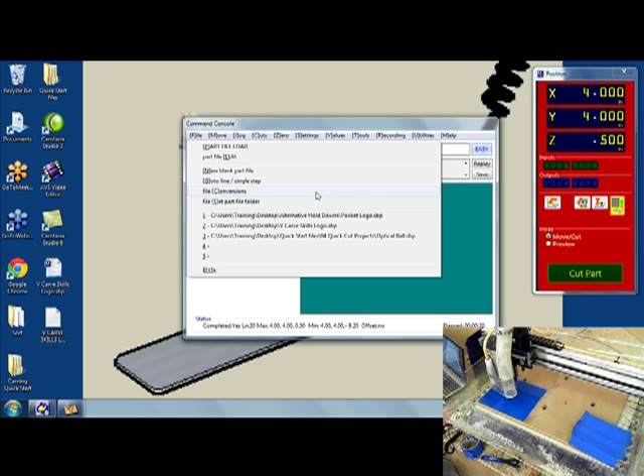Alright. So we're zeroed in our X and our Y and our Z. Now I can file, part file load, and we'll show how well this glue holds down. Profile heart. Okay, now it's going to ask me, did I put the right bit in? I did. Did I 0 it to the top? I did. And make sure your spindle is in the on or the router's in the on position before you hit OK. Safety guards in place as always.

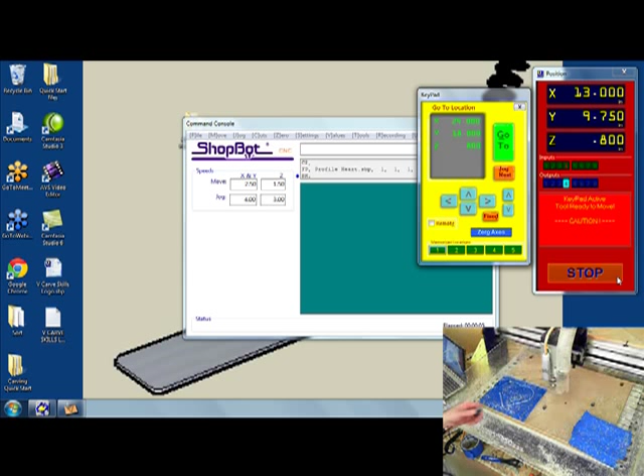Boom. The heart didn't move. No tabs needed. So, as well as the stuff does hold, it does come off pretty easy too. And all I keep is a little flathead screwdriver right by, so I can just go in and pluck the parts out of there. And there's the bad part. The scrap, I can pull that out of there. It pulls up everything underneath.

And then this one here, same thing. I'm just going to pull that up. Leaves a little bit of residue. Again, it is messy, but I can take and pull my tape or my backing off this. And there's my clear heart. I can just take my air gun and blow it off, and then I've created my plastic heart.

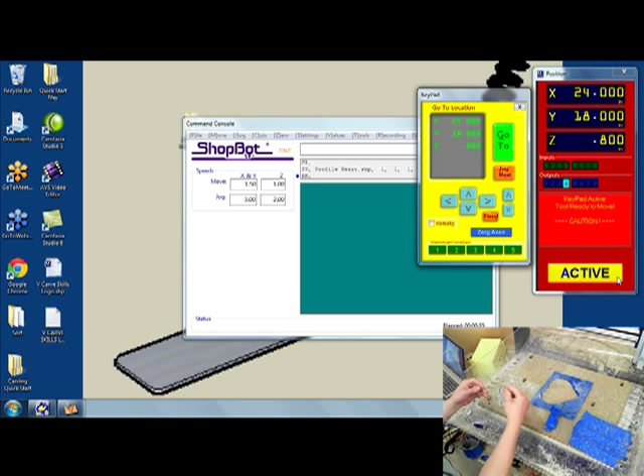So, again, this thing now has got sticky around it. It's kind of a pain in the butt. I can surface it. What I have at home on my tool is I just have a big 3 foot by 3 foot piece of MDF that I just screw down to the table, and that's what I spray on. That way I'm never actually spraying my spoil board and getting it all dirty.

So, alright, just a few alternative methods. There's a ton of different hold downs. We could sit here and do them all week long, but just thought I'd show you a few that I've been using lately and thought they could be useful to you.